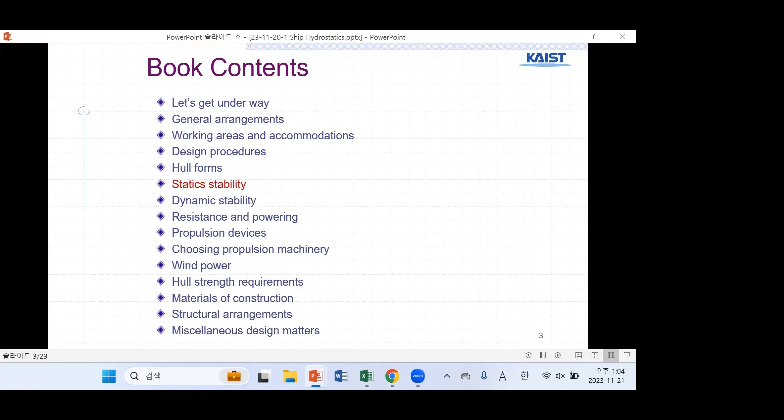So this is hydrostatics, not dynamics. This is the textbook we are covering, and chapter 6 is statics and stability. My part will be buoyancy and fluid mechanics, pressure, and things like this. So we start with solid and fluid.

What is the difference? A solid may be deformed by an external force. However, its shape does not change indefinitely. So soft material, or not so soft, may bend, something like plastic. We can apply force and it changes a little bit, but it is still solid.

So I may say we already studied topology and geometry. Did I? Topology and geometry. Did I explain this one before? No? Topology and geometry. Because we studied NURBS and surfaces as shape geometry, I may not have explained this one.

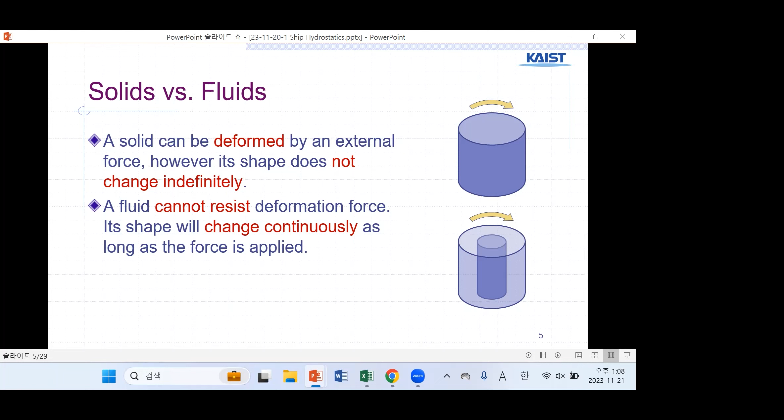Once again, back to solids. A solid can be deformed, soft material also. However, the shape does not change indefinitely, until they break. But a fluid cannot resist any deformation; with small deformation forces, the shape will change continuously. Like water, any force makes it change its shape. No topology, no shape, no geometry. So that is the main difference between solid and fluid.

And fluid is a bigger concept than liquid or water. Liquid is one part of fluid, and there is also gas. Who is from the aerospace department here? Aerodynamics is the most important thing in aerospace engineering. For shipbuilding, water dynamics is the fluid dynamics. Aerodynamics is less important, but they are very similar. So gas dynamics is here, and plasma and plastic solids also.

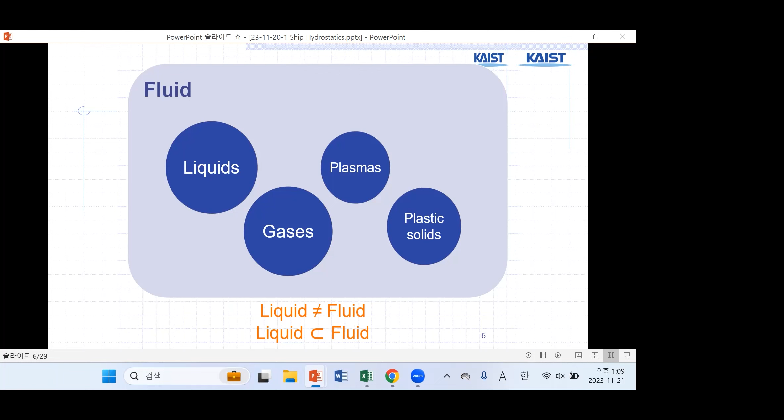Density you already know from undergraduate studies or high school: the density of a fluid is defined as mass per unit volume, mass divided by volume. The unit is kilograms per cubic meter, affected by changes in temperature and pressure, especially for aerodynamics. But for water we can assume it is not changing; the change based on temperature and pressure is very small, so we can neglect it.

Typical values: air is small, then fresh water and seawater, so the ratio is about 800 times. It gives a very big difference in physics. Pressure is defined as force per unit area. Force is something like weight. As I told you before, air pressure here is the weight of the air above me. Similarly, underwater the pressure is the weight of the water above that point. So every 10 meters of water depth, the pressure increases by about one atmosphere.

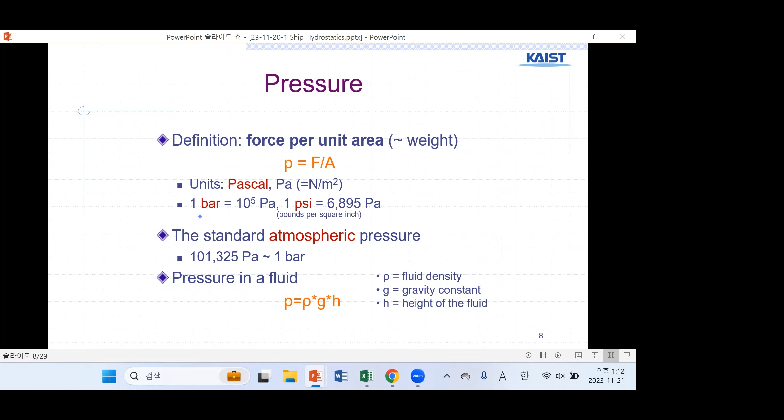Correct. The standard atmospheric pressure is 1 bar. 1 bar here, okay, is about that, right? And pressure in a fluid is density, gravity constant, and height. It is the same as the weight of the water overhead at that depth.

And viscosity is a measure of resistance of a fluid which is being deformed by either shear stress or tensile stress. So it looks like honey or other grease. We call this thickness in everyday terms. Water is thin, honey is thick. So that is a kind of viscosity in everyday life terminology.

And liquids and gases. So the pressure is a force per area. It's quite different because change of volume is compressibility. Compressibility is change of volume based on pressure. So it's a derivative of volume compared to the pressure change. But water can be assumed to be incompressible.

So it is actually 0.1% volume under 20 bar pressure. 20 bar means 200 meter water depth. Very high pressure, right? 20 bar. But volume change is only a thousandth of it. So we can neglect the compressibility. But in aerodynamics, compressibility is very important.

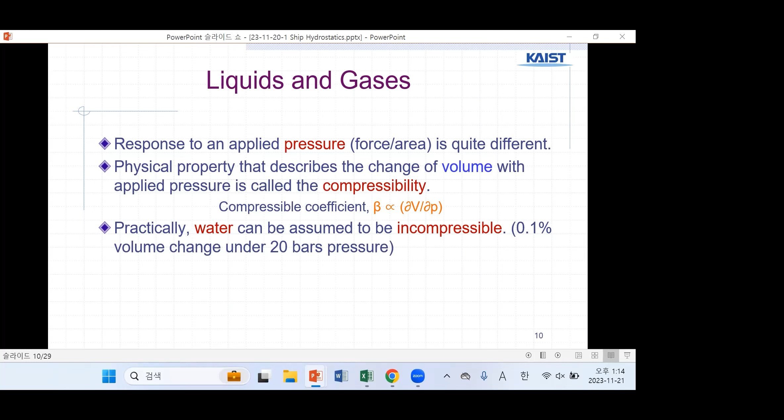So hydrodynamics and aerodynamics have a difference. Similar, but not quite the same. Density change is the most important, and also compressibility, and also free surface. There is a free surface. Free surface is a surface between air and water. That gives you very different changes, especially the wave. Waves occur only at a free surface.

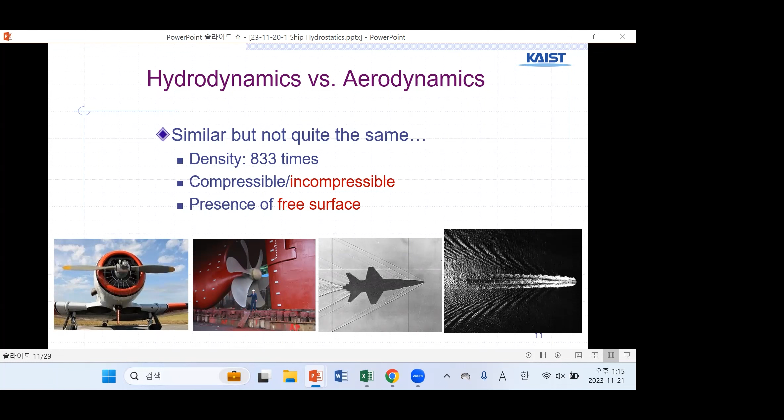But also you can observe some free surface effect, something that looks like a wave, in aerospace. So similarity, right? Shape is similar, not the same, but very similar. And also you see that the propeller is different. The water propeller and the air propeller are different because of the big density change.

Pressure in a static fluid. As I told you before, water depth is proportional to the pressure there. So you expect that pressure is higher in the lower part. Pressure increases with depth. Pressure acts at a point in all directions equally, right? And also perpendicular to the surface. Actually, this one is not correct.

Because of the size of the bubble, there should be a small difference in pressure. So at a single point, with no size, all directions are the same. With some size, say this is 10 meter diameter, 10 meter means 1 bar difference of pressure. So if this diameter is 10 meters, then the pressure here and here can differ by 1 bar.

And also you can expect that pressure at the top is small and then increasing as water depth increases. So you need a thicker steel plate in the bottom of the ship compared to this. But that is only for the water pressure. There are other forces coming to the steel structure, so it is not so simple. But if you think only about water pressure, the top can be thinner. And in ships, the bottom plate is thicker than the side, not in the same proportion as the water pressure, but there are differences.

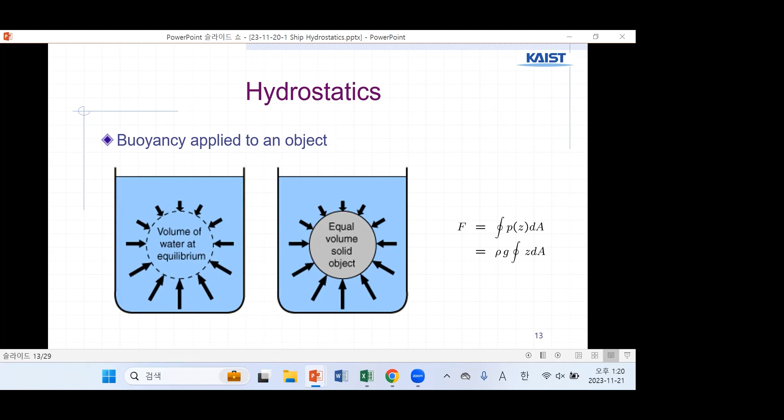So buoyancy is once again the integral of all the outer pressure forces over the surface. Because the size is different, there should be a net force supporting the body. That net force we call the buoyancy force. And that buoyancy force is the same as the equal volume of displaced water. If there is no body, water was there. But because of this solid, this amount of water is displaced. And the weight of that water is the same as the buoyancy force. We already told you several times.

So there is an upward acting force, coming from the integral of all the pressures, balanced by the weight of the object, the gravity. So this can be a ship on the water surface. The total weight should be the same as the buoyancy, so that the ship is not moving, static. Force equilibrium between water pressure, buoyancy, and the weight of the ship. The weight of displaced water we call the displacement. It looks simple, but it can be complicated in ship design, because a ship is big and complex. But the basic physics is very simple.

A submerged body means a submarine. Fully submerged, it can be neutral, but it can be floating. So partially submerged means floating. So if you want to be a commander of a submarine, how can you manage the buoyancy of your ship or submarine? By controlling the ballast water tank.

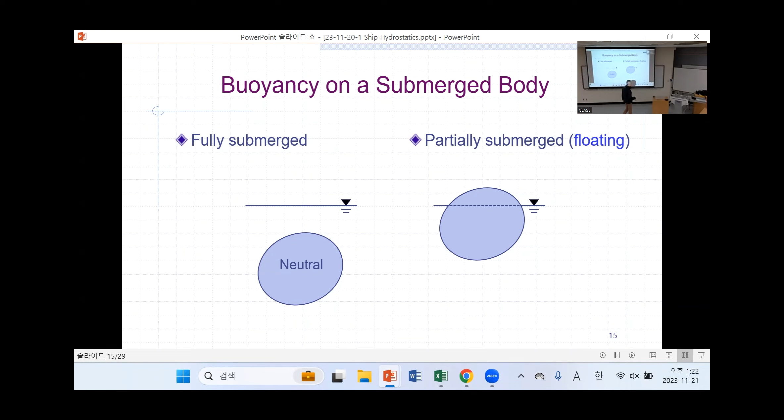Right? And with an iceberg, only the tip of the iceberg is above the water surface, depending on the density of the ice. Your body too; I told you before that your body is very similar to an iceberg. If your lungs are full of air, you float a little bit above water, similar to an iceberg.

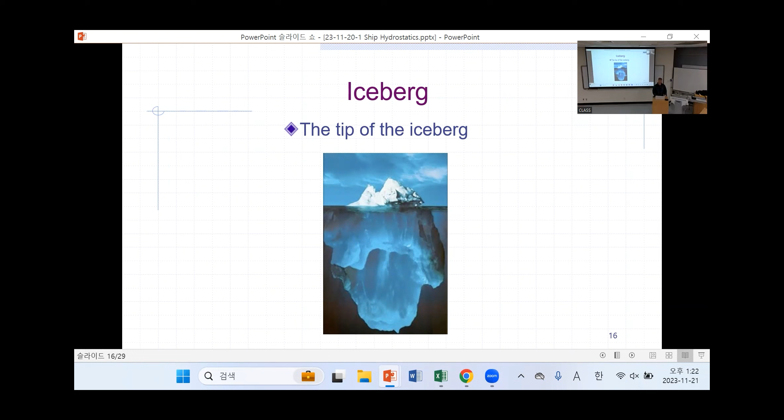Submarine: how to dive and surface. For a deep dive, there is a water tank. The water tank is outside of the main hull, and it is full of water there. So the ballast water is filled, not all of them, but theoretically there is a change. All right, so there is a video. Let's see.

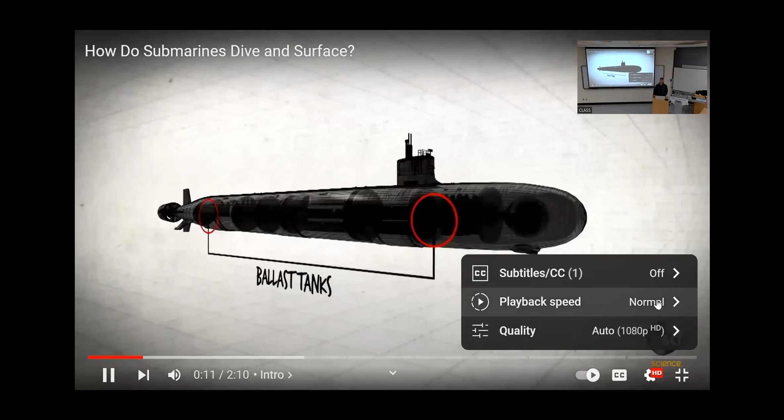They can reach depths of about 800 feet thanks to a system of internal and external ballast tanks. We have 5 external ballast tanks that are normally filled with air when I'm riding on the surface. When it is time for us to dive, we'll open vents on those ballast tanks. There's grates on the bottom of the ship that allow water to come in, displace the air, making the ship just slightly negatively buoyant. We then proceed down to the depth that we want to go to. And we use internal ballast tanks to make the ship neutrally buoyant, so that then we can progress on our way in whatever depth we choose.

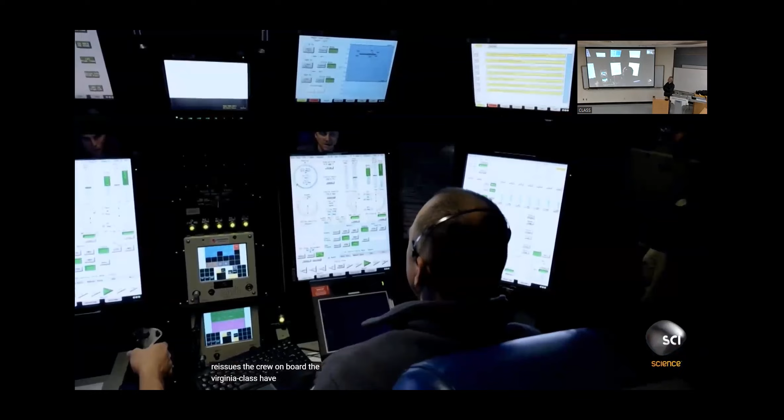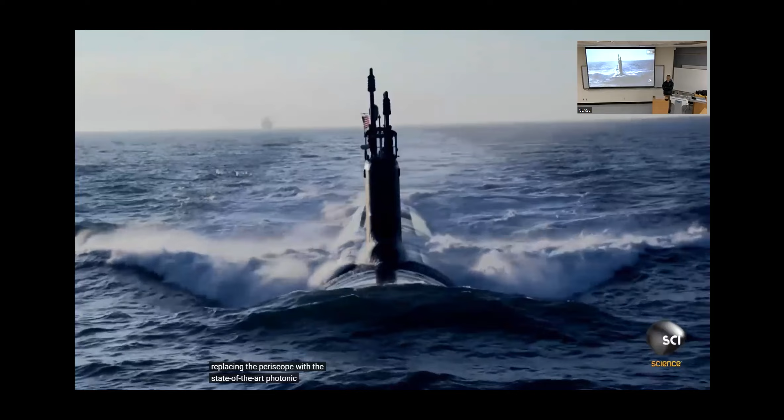The crew on board the Virginia class have an abundance of cutting-edge controls at their fingertips, one of which is replacing the most iconic feature in submarine history. The periscope has been a key component on the submarine for over 100 years, but engineers on the Virginia class are taking a bold step toward the future by replacing the periscope with a state-of-the-art photonic mast. The photonic system is a mast with a sophisticated camera system that allows what would normally be displayed just in a periscope to be displayed on widescreen monitors throughout the ship. I used to have an optical periscope that came down, which drove the construction of the submarine and the orientation of all of the rooms on the submarine.

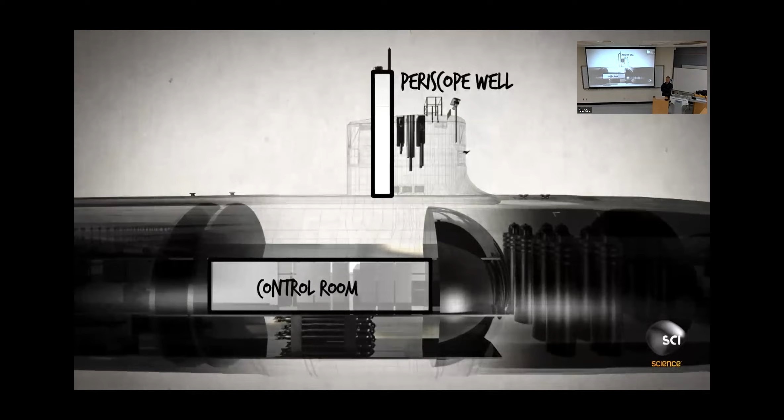Bulky periscopes force most submarine control rooms to be located on a cramped upper deck. On the Virginia class, the compact imaging equipment is housed in a part of the submarine known as the sail. This allows the sub's control room to be built on the wider second deck. My control room that I'm standing in right now houses all of the important decision makers. It really brings the crew together to operate as a team, as a unit.

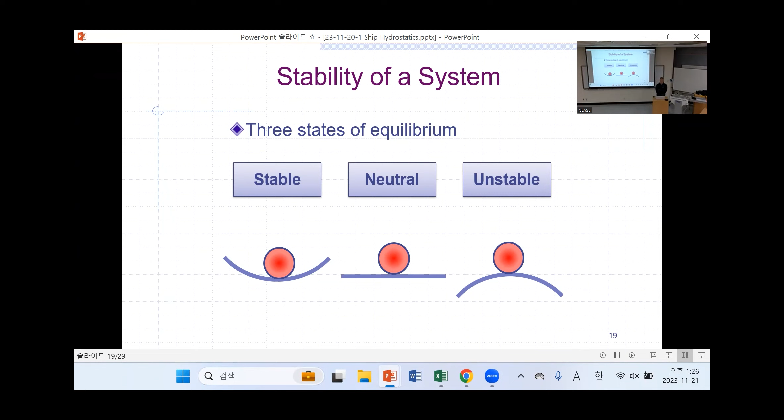Neutral, they stay wherever they move. But the unstable one, if you have a small disturbance, falls down, right? Something like this one, disturbance. So ship stability is the same theory, right? So we need to have a stability index for the ship, because the ship is moving in very rough water areas, storm areas, big waves and high wind. If it is stable enough, then the ship can survive.

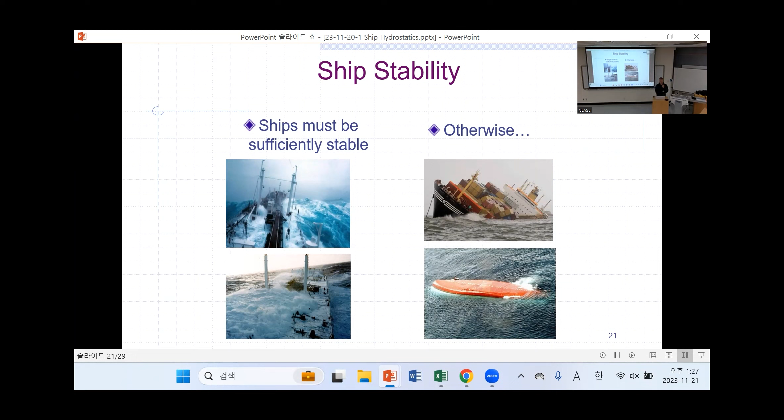Otherwise, even though the water is calm and no big storm is coming, the ship can capsize even with a very small disturbance. Same theory as before. Ship stability: then how can you, as a ship designer, design a ship with good stability? A ship is statically stable, and then dynamically stable. There is another word. We will see that on Thursday, but now we are talking about statically stable.

It floats upright when at rest in still water. Still water means there is no wind, there is no wave. It should be upright and return to its initial upright position if there is a slight temporary deflection to the side, which is called the disturbance. It can be wind, it can be a wave, or it can be the movement of some people.

If you have a chance to ride a very small boat, you can capsize your boat, because compared to the boat, your body weight is big. But for a big ship, your body is negligible. Your movement doesn't matter much.

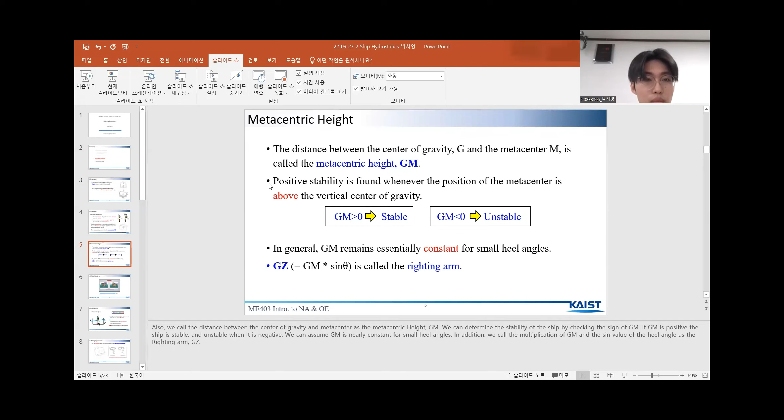I will introduce more concepts about hydrostatic stability. First, I will introduce the concept of metacenter.

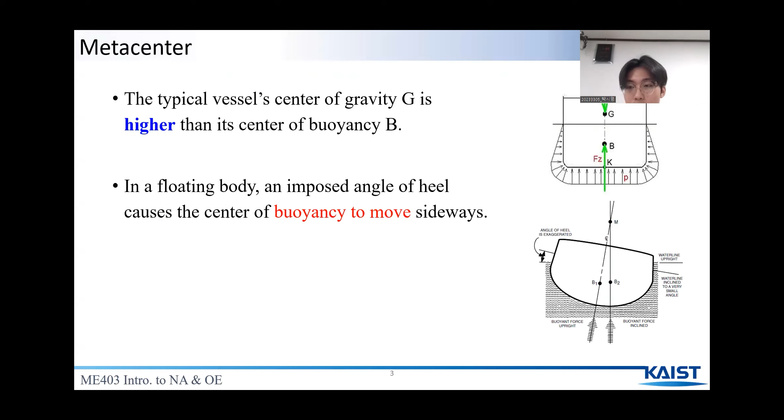Typically, the vessel's center of gravity is higher than its center of buoyancy. When a stable vessel is tilted, the volume displaced is larger on one side. Gradually, the center of buoyancy shifts towards the same side.

The vertical line through the new buoyancy center will intersect the ship's center line somewhere above the center of gravity, which is termed as the metacenter of the body.

An analogy can be made with the rocking chair. As the rocking chair moves, the center of support, which corresponds to the center of buoyancy of the ship, also moves, keeping the chair from tipping over.

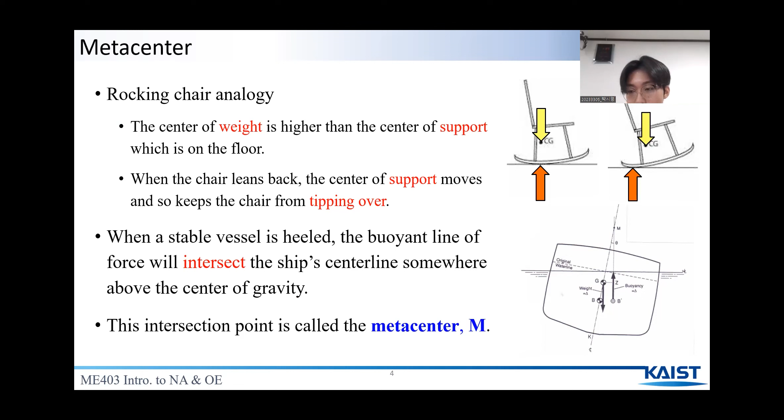We call the distance between the center of gravity and metacenter the metacentric height, GM. We can determine the stability of the ship by checking the sign of GM. If GM is positive, the ship is stable, and if GM is negative, the ship is unstable.

We can assume GM is nearly constant for small heel angles. In addition, we call the multiplication of GM and the sine value of the heel angle the righting arm, GZ. Let me show a video explaining the concept of GM and stability.

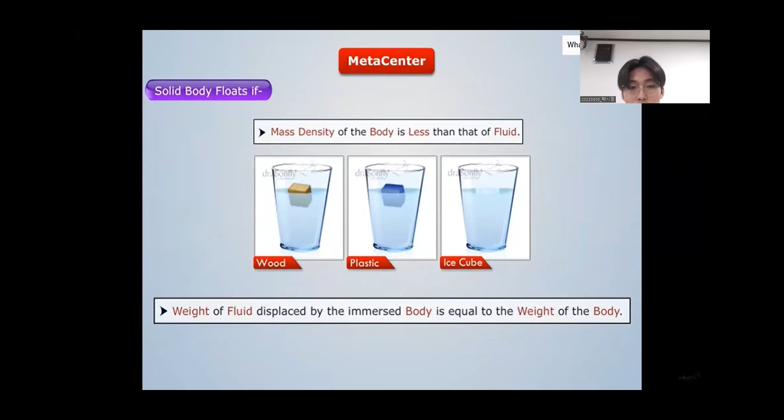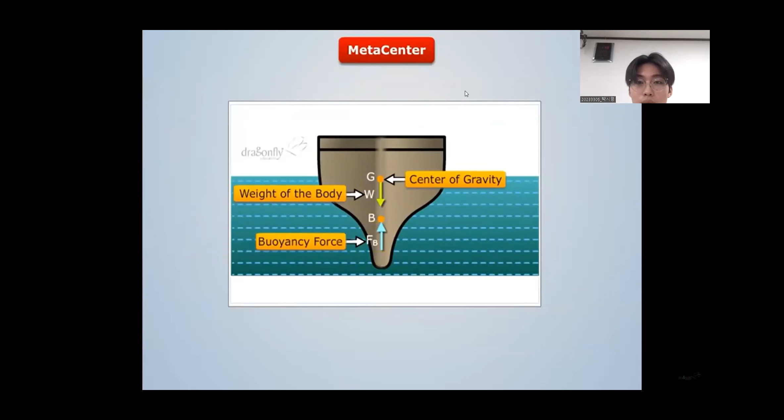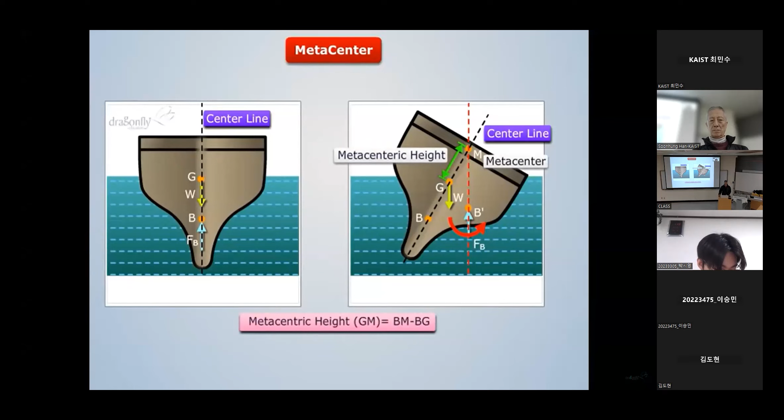They are stable, unstable,

and neutral equilibrium. When M is above G, then in this case, a restoring couple is formed by the buoyancy force and the weight of the body, which tends to turn the body to its original position. Thus, the body is said to be in stable equilibrium.

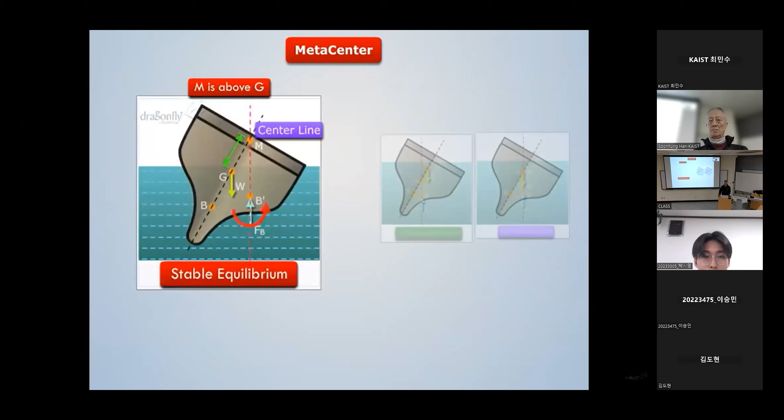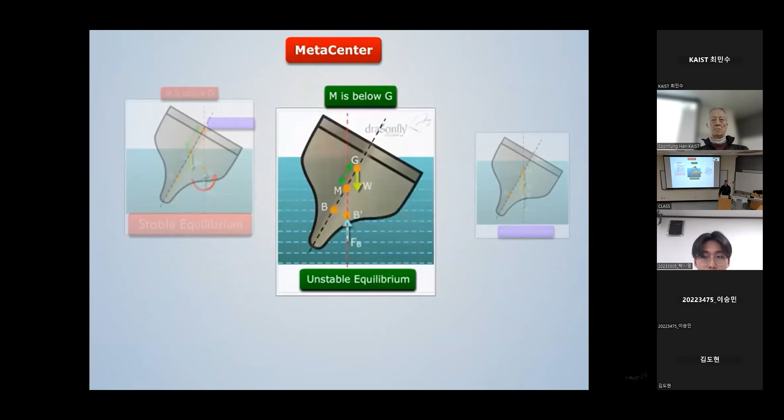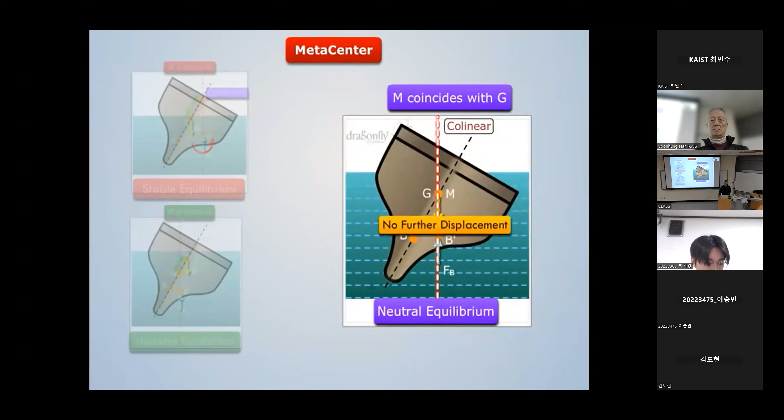And when M coincides with G, then in this case, the line of action of the buoyancy force and the weight of the body are collinear and pass through the same point. Due to this, the body neither returns to its original position nor increases its displacement further. Thus, the body is said to be in neutral equilibrium.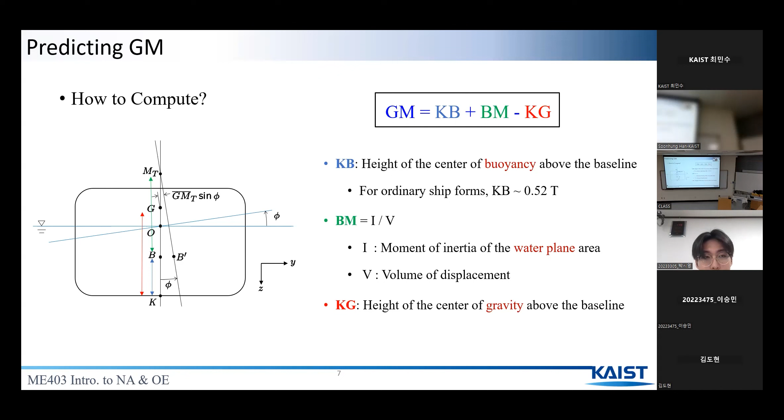The actual GM can be found by the inclining experiment. Let me show you some video.

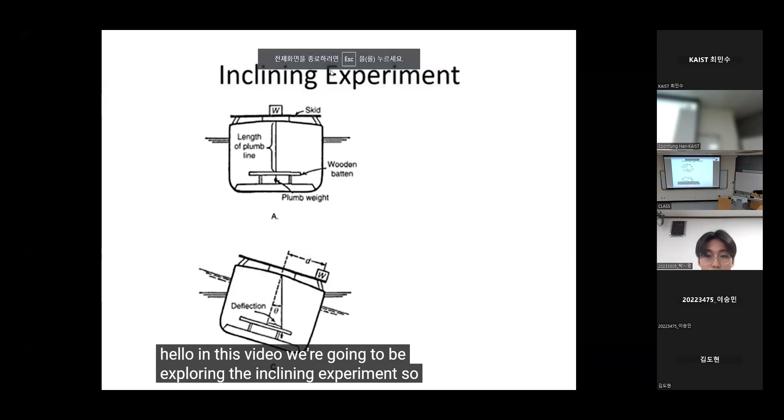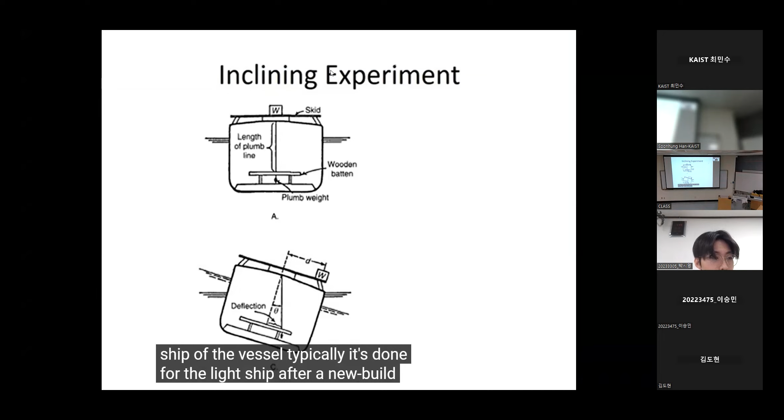Hello, in this video we're going to be exploring the inclining experiment. The inclining experiment is typically done to determine the KG of the vessel. It can be done for the light ship of a vessel, typically done for the light ship after a new build or after some kind of modification in a maintenance or yard period. The basic idea here is that you have a known weight.

You might load it up on the center line, and on the ship, you will hang a pendulum. You'll know exactly how long that pendulum is. And down at the bottom of the ship, you're going to set up a kind of wooden batten down there. That pendulum will have a plumb weight on it.

Then what you'll do is take that weight, you'll know what the weight is, and you'll slide it a known distance to port or starboard. In this case, looking at it from astern, they slid the weight a known distance from center line to starboard.

What happens then is that pendulum is deflected a certain distance, and you can actually measure it on the batten, you can draw a line there. So you have a line drawn for the center line, and then you have a line drawn after you've inclined it with a known weight and known distance off the center line.

And now you have a deflection. There's a ratio of the length of that pendulum and the deflection, and we can relate that to this angle theta, which would be the angle of list created by that off-center weight.

If an internal liquid exists, it will flow along the direction of heeling. This will eventually reduce the metacentric height, since it changes the center of gravity, CG. This effect is called the free surface effect, and it increases the danger of instability, which can lead to capsizing. However, the free surface effect is neglected if the tank is completely filled with liquid.

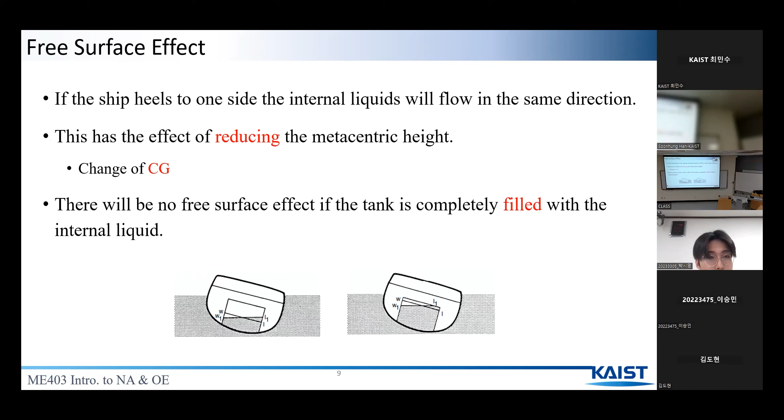The range of stability can be expressed by the relation between the angle of heel and the righting arm. The heel angle at which the righting arm crosses zero is the inclination where vessel stability changes from positive to negative.

The longitudinal stability must also be considered. A ship rarely capsizes in the fore and aft direction. However, the trim change caused by adding or removing weights in the longitudinal direction is also an important concern.

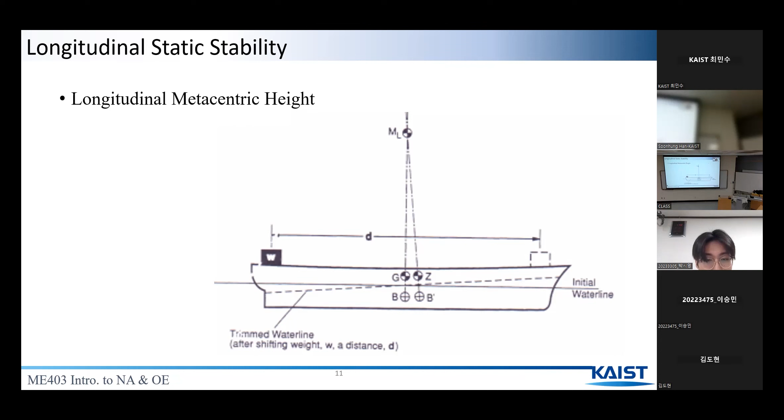When a hull is damaged, flooding occurs, which increases the instability of the ship. Once a compartment is flooded, the buoyancy provided by that compartment is lost. Then the ship will sink deeper, and its longitudinal center of buoyancy will usually move, causing trim.

Here we introduce the concept of intact stability and damaged stability. Intact stability refers to the stability of a vessel in its undamaged condition. It deals with the vessel's ability to resist capsizing or rolling excessively due to external forces such as waves and wind. Intact stability calculations take into account factors like the vessel's geometry, center of gravity, buoyancy, and moment of inertia.

Damaged stability, on the other hand, focuses on the vessel's stability after it has sustained damage or flooding. It assesses the ability of the ship to remain afloat and maintain stability even with compartments flooded or structural damage. Damage stability calculations are crucial for evaluating a vessel's survivability and ensuring it can withstand damage scenarios. These calculations consider factors like the extent and location of damage, free surface effects, and redistribution of weight and buoyancy due to the damage.

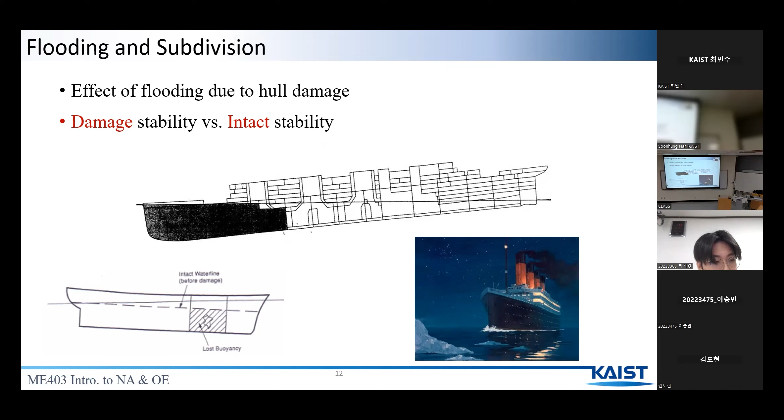A bulkhead is an upright wall within the hull of a ship that increases the structural rigidity of the vessel and creates watertight compartments that can contain water in case of a hull breach or other leak. A ship should satisfy the one-compartment standard, which requires that at least one compartment bounded by watertight bulkheads must be floodable without sinking the ship.

Other than ships, the stability of submarines is considered in two circumstances: when it is fully submerged and when it is partially floating. First, when the submarine is floating, the mechanism of stability, called surface stability, is the same as for surface ships. When it is totally submerged, the BM term is neglected since the center of buoyancy does not move. Then the stability is determined by whether the center of buoyancy is above the center of gravity.

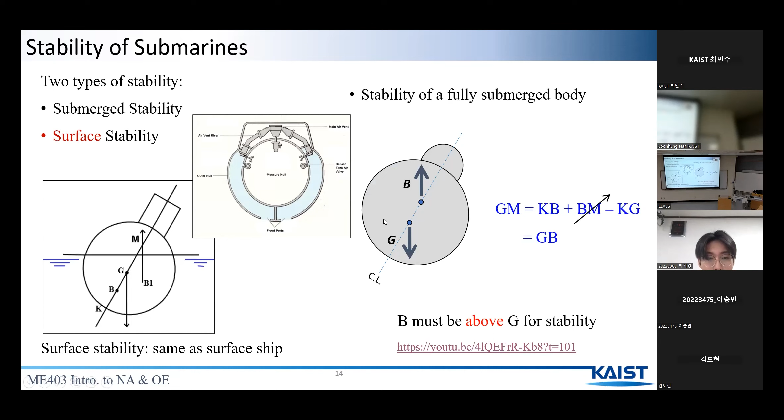I will show you some video.

Looking at the differences between ships and submarines. Firstly, most obviously, there are huge implications in terms of buoyancy and stability. With a ship, you just need to make sure the underwater part of your vessel displaces enough water to provide buoyancy to keep it afloat.

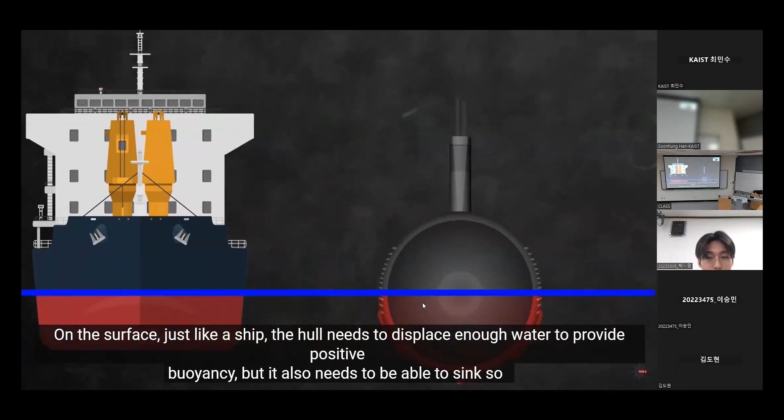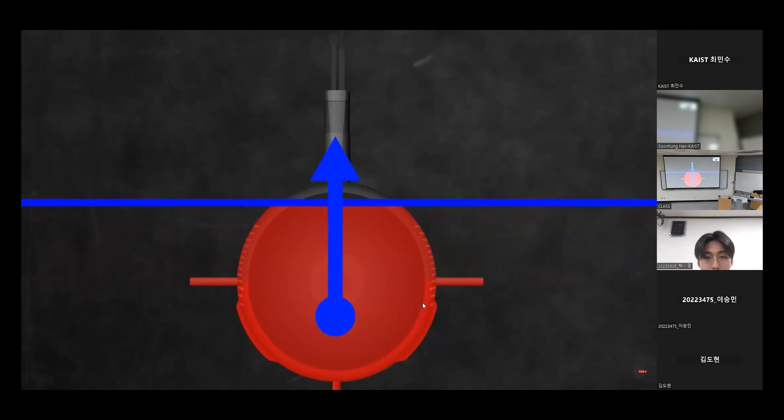Submarines, of course, are a little different. On the surface, just like a ship, the hull needs to displace enough water to provide positive buoyancy, but it also needs to be able to sink, so you need to increase its weight to make it weigh more than the water it displaces. You just flood some ballast tanks, making the vessel heavier and less buoyant, so that it sinks. That's great for going down, but then when you're deep enough, you need to be neutrally buoyant instead.

You want the submarine to weigh the same as the water it displaces, so that it neither floats nor sinks. Again, it's quite simple - you just pump out a little ballast water using compressed air from cylinders. Done precisely enough, you can make the submarine weigh the exact same as the water it displaces, making it neutrally buoyant. So that deals with buoyancy, but what about stability?

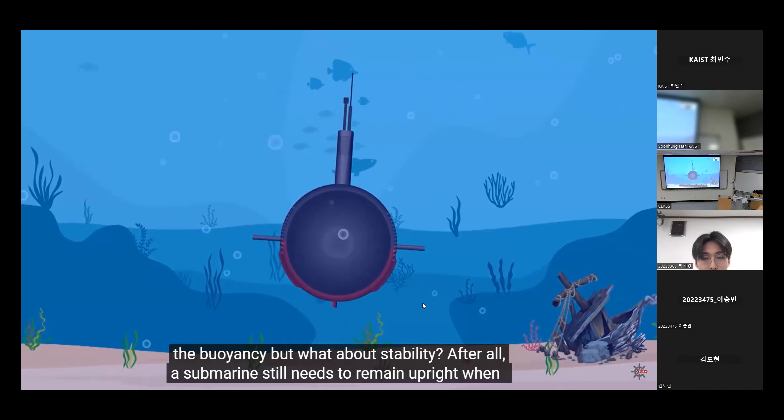After all, a submarine still needs to remain upright when underwater. Remember how a ship uses form stability to stay upright? This just means the shape of the hull provides a righting force whenever the ship leans over slightly. The underwater shape changes, shifting the center of buoyancy and separating the force vectors, creating a moment to right the ship. This is how, counterintuitively, the center of gravity can be above the center of buoyancy.

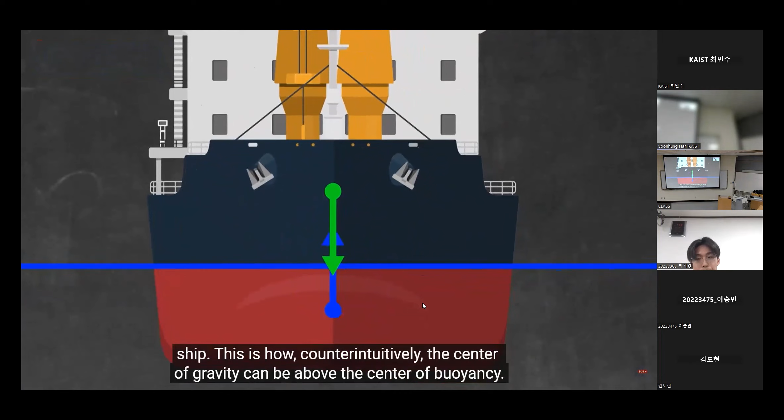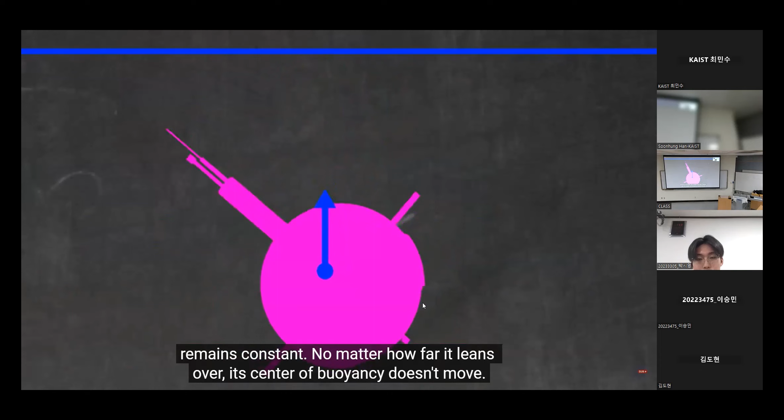A submarine, however, can't do that. When it's fully submerged, its underwater shape remains constant no matter how far it leans over - its center of buoyancy doesn't move. Instead, you have to rely on keeping the center of gravity below the center of buoyancy. Your stability is provided by the force of gravity and the force of buoyancy pulling in opposite directions.

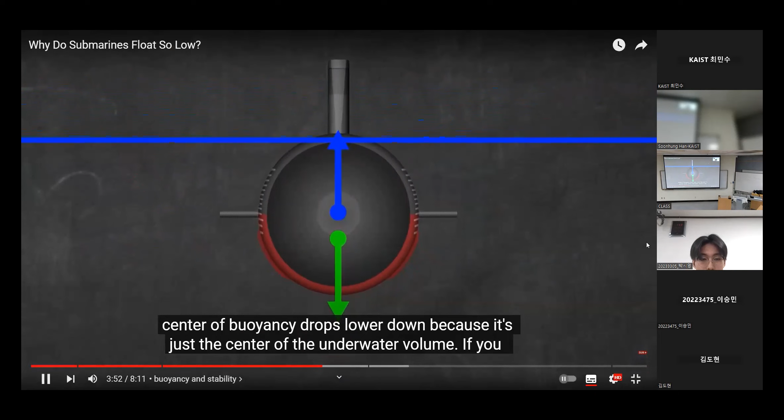Underwater, it's easy because you just make sure the heavy things are placed low down, but on the surface it can be a little harder. Think about it: as the hull emerges from the water, the centre of buoyancy drops lower down because it's just the centre of the underwater volume. If you let it drop too low, it might go below the centre of gravity and the submarine would just flop over. This is why submarines appear to float really low in the water. They need to keep the centre of buoyancy above the centre of gravity.

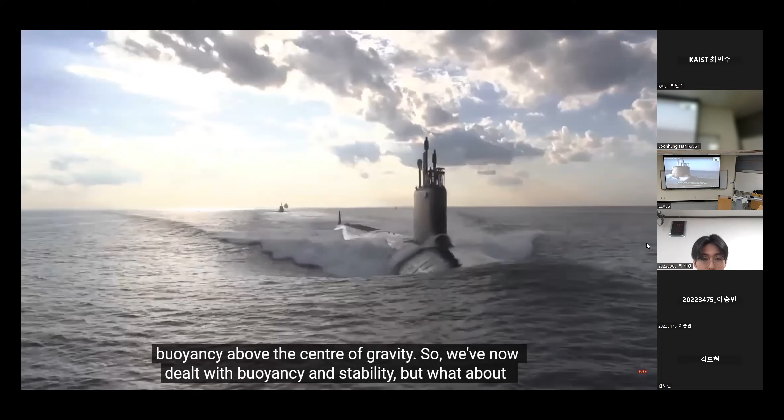So, we've now dealt with buoyancy and stability, but what about navigation? We already said...

Thank you for listening.

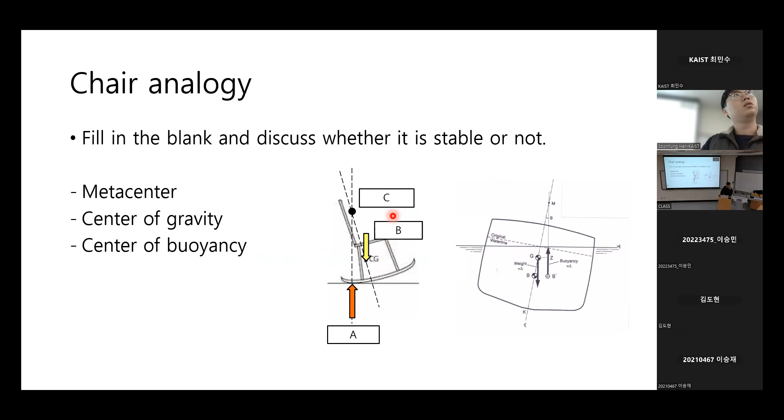Yes, it is correct. As he mentioned, A is center of buoyancy, B is center of gravity, and the cross point of the lines is the metacenter. As he said, it is stable because the metacenter is above the center of gravity.

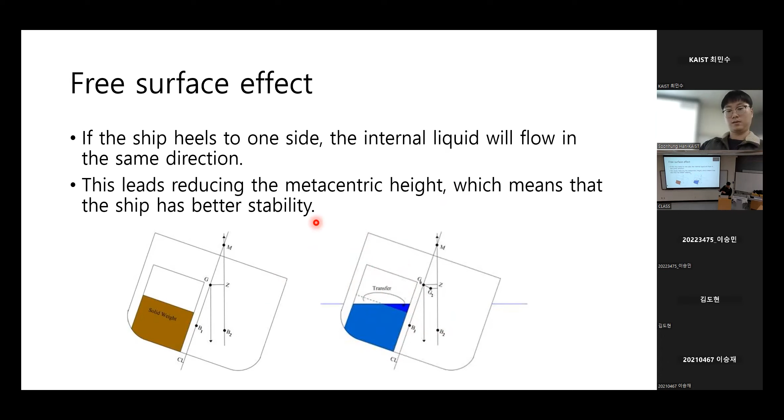For the free surface effect, when the ship tilts to one side, there is some liquid in the ship, so the liquid flows in the same direction. This reduces the metacentric height, which means the ship has worse stability compared to the condition without the free surface effect.

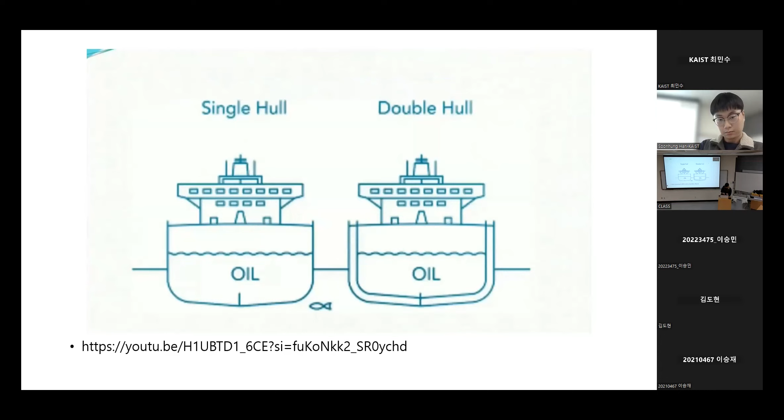The moment we talk about liquids, they have a tendency to flow since their weak intermolecular force allows them to do so. It simply means liquids may acquire any shape they are kept in. As all of you must know, a ship carries a number of liquids in its various tanks for the purpose of its own operation.

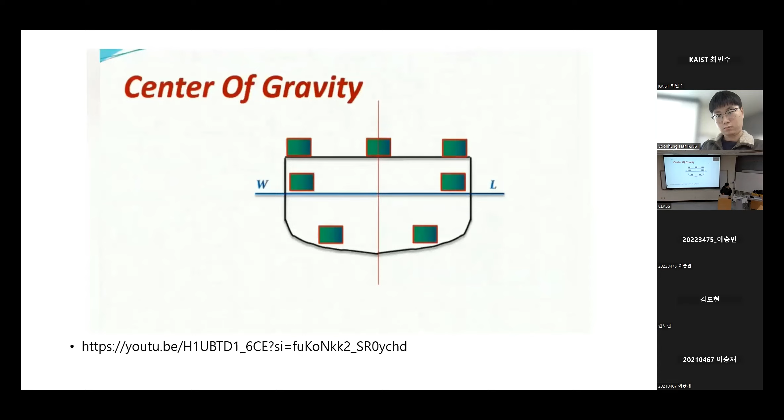Everything in or on a vessel has its own center of gravity: the engine, the anchor, the ship's hull itself, your batteries, the cargo, and of course the liquid in your tanks. According to the weight and location, everything aboard contributes to the position of the vessel's overall center of gravity. Heavier things influence the position of center of gravity more than light things. Off-center weights can pull the center of gravity off the center line, causing the vessel to list. List means a permanent transverse inclination acquired by the ship.

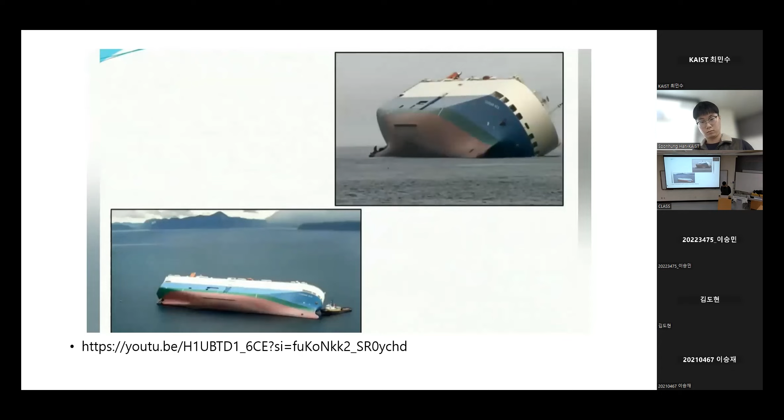Let us now arrive at the concept of free surface effect. When a tank on board is not completely full of liquid and the ship heels, the liquid moves in the corresponding direction of the vessel's inclination. Because of this, the center of gravity of the ship moves away from the center line, which reduces the righting lever and also causes a virtual reduction in the metacentric height of the ship.

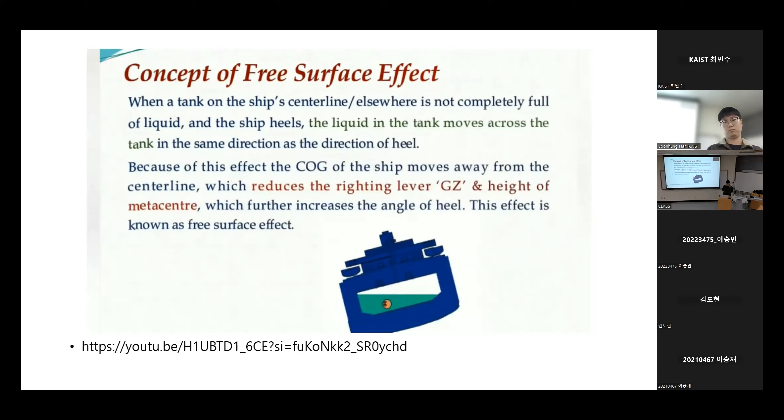Since we are talking all about transverse stability of the ship, let's have a look at a cross-section of the ship. The ship, floating on waterline WL, consists of a partially filled tank inside. Because of some external forces, the ship will now heel in a particular direction.

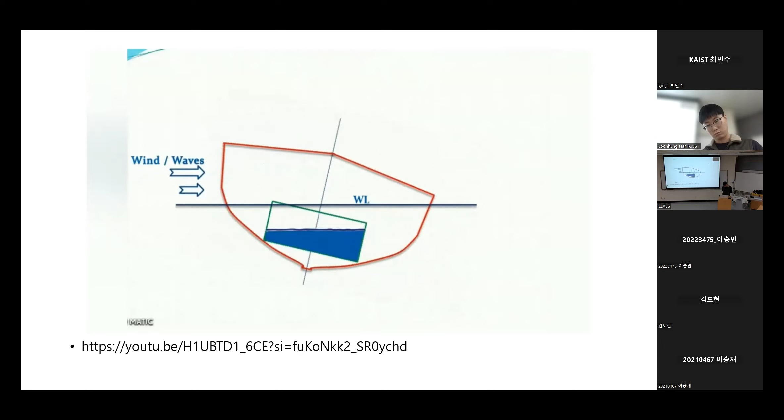The liquid within the tank would also shift in the corresponding direction of the vessel's inclination. The transference of liquid from one side to another takes place in the form of triangular wedges, respectively called the immersed wedge and the emerged wedge. Just by looking at this diagram, I hope you understand why one is called the immersed wedge and the other the emerged wedge.

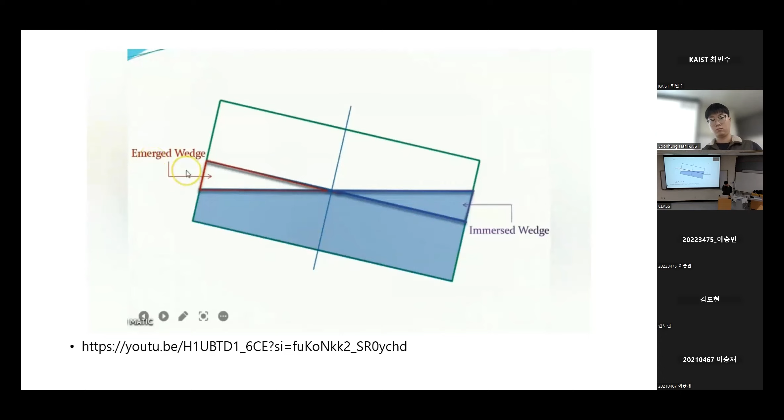Since a considerable liquid's mass has been shifted in a particular direction, this will also cause the center of gravity of the ship to move correspondingly in the same direction. The gravitational weight of the ship will now be acting downwards through the new center of gravity G1. If we extend this line further upwards, it would intersect the center line somewhere. Now this vertical line makes an angle with the center line, the so-called angle of heel. This is theta.

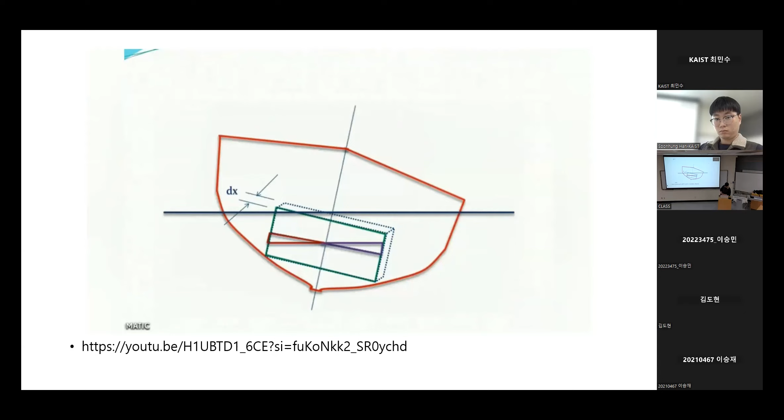The ship has been assumed as floating with a displacement delta. Since your ship's hull may have a complex curvature throughout its length and breadth, it is useful for us to consider a small strip of the tank lying at a particular section, the length of that strip being dx, which is very small. Let us now look at the geometrical dimensions of the tank. It has a half breadth of y. The centers of gravity of the immersed and emerged wedges lie at 2/3 of y, measured from the tank's center line.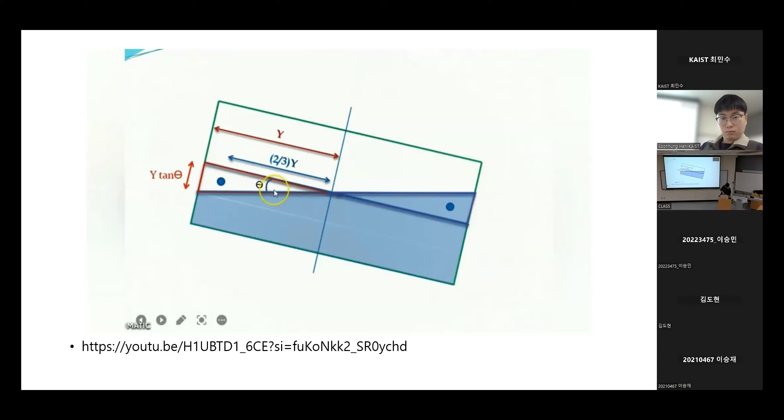Some more dimensions can be seen here. Just like this, we have a equals y tan theta, since the angle between the initial and final waterlines is theta. The shift in center of gravity, that is G1, is determined by dividing the moment of mass by the ship's displacement. So first we will determine the liquid's mass in that particular wedge, and then we will multiply it with the respective distance covered by its center of gravity.

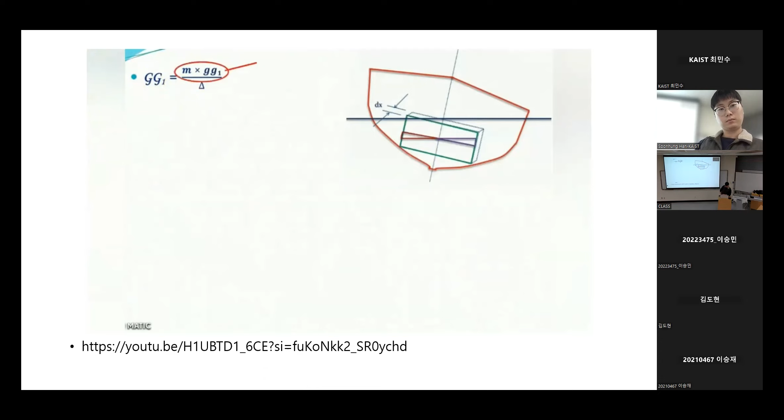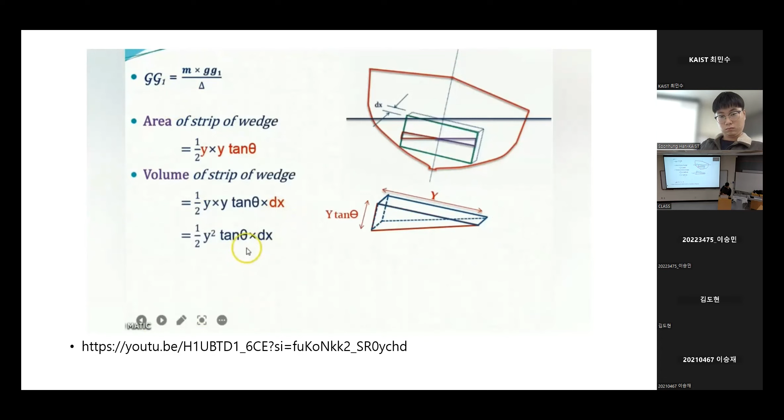To do so, first let us look at the cross-sectional area of that liquid wedge. The area of this liquid wedge is given by half of base into height. It is simply half of y into y tan theta. The volume of that small strip having length dx is given by multiplying it with dx. Further simplifying, it becomes half of y squared into tan theta into dx. Now, how much will be the mass of liquid contained in that small strip? We simply multiply this volume with the density of the liquid contained inside, the density being rho.

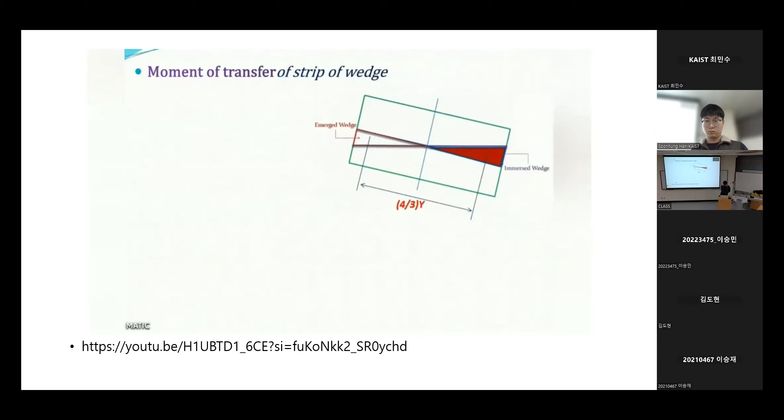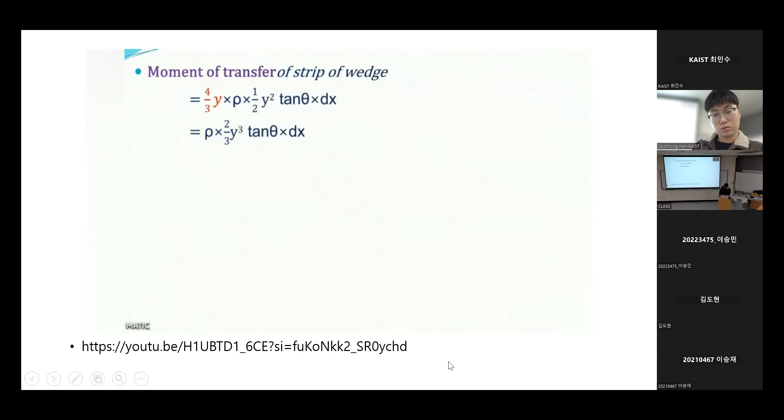Now, we arrive at the moment of transfer of the strip of wedge. This liquid wedge is transferred to the other side, and the distance covered by its center of gravity is 4/3 of y. Let us multiply the liquid's mass with this distance. Simplifying further gives us rho into 2/3 of y cubed into tan theta into dx. This expression gives us the moment of transfer of that small strip of wedge. In case we want to determine the moment of... there is so much mathematics.

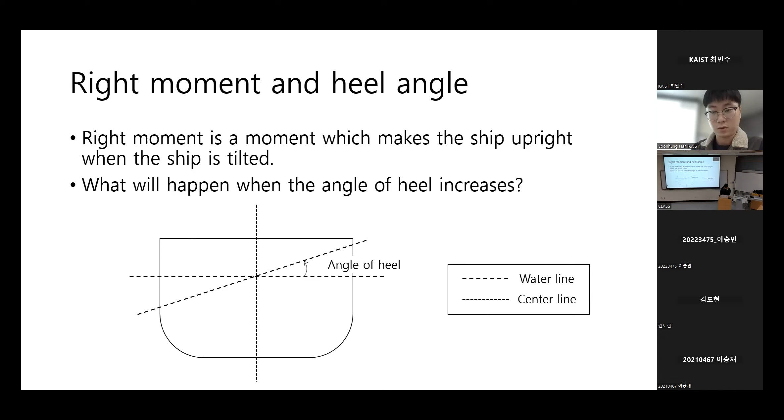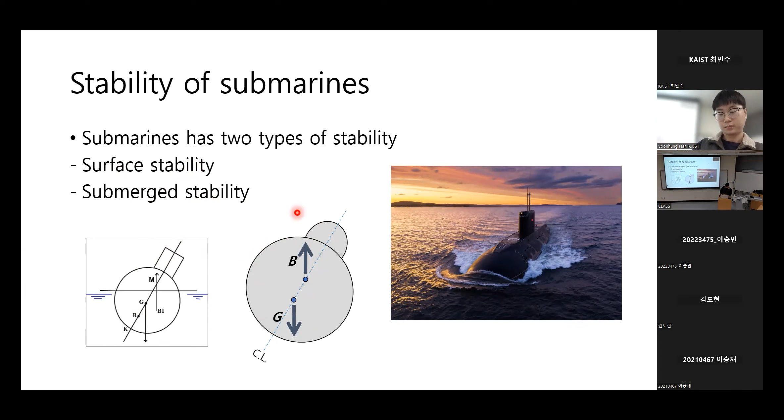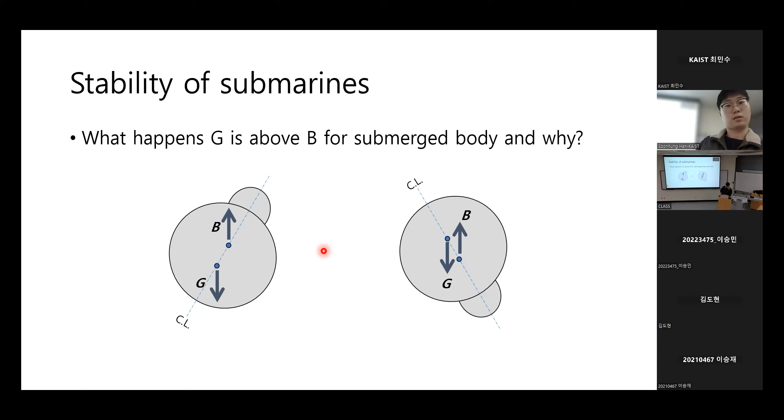For a submerged body, the height of the metacenter is the same as GB. GB should be positive to be stable. GM is the metacentric height, and for a submerged body it is the same as GB, so GB should be positive to be stable. Therefore, case A is stable, whereas B is unstable. Yes, this is all. So thank you.